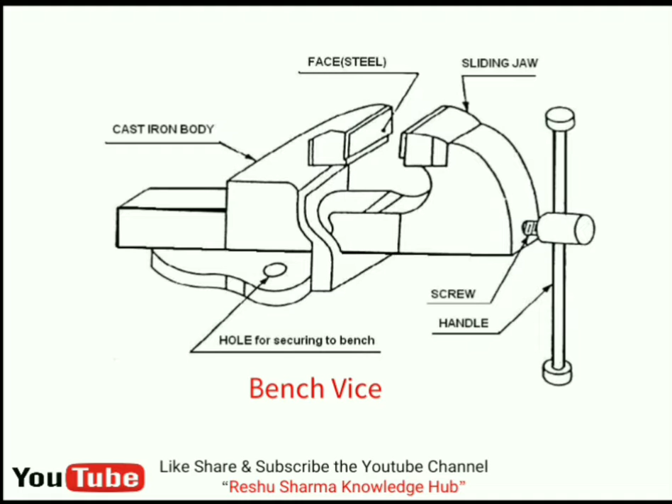This jaw is moving to and fro. This is our face steel, or this is our fixed jaw. This is the body of this, and this is the hole for securing it to the bench. As we rotate this handle, this sliding jaw moves, and whatever workpiece we are going to hold, we will put it here and it will hold it tightly, and we can perform any operation on this bench vice. Generally, basically it is a holding device.

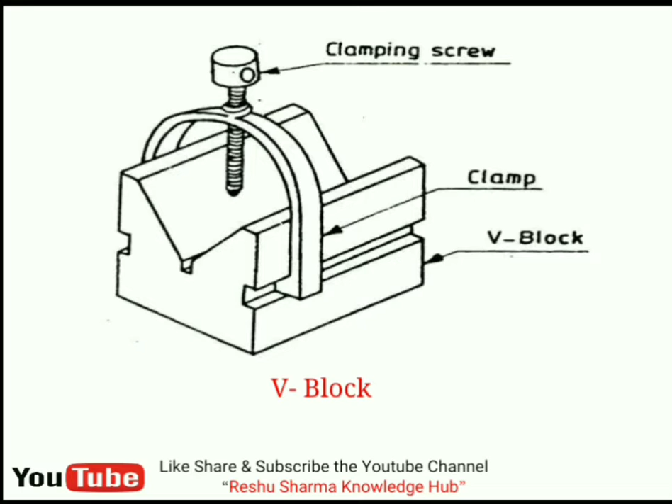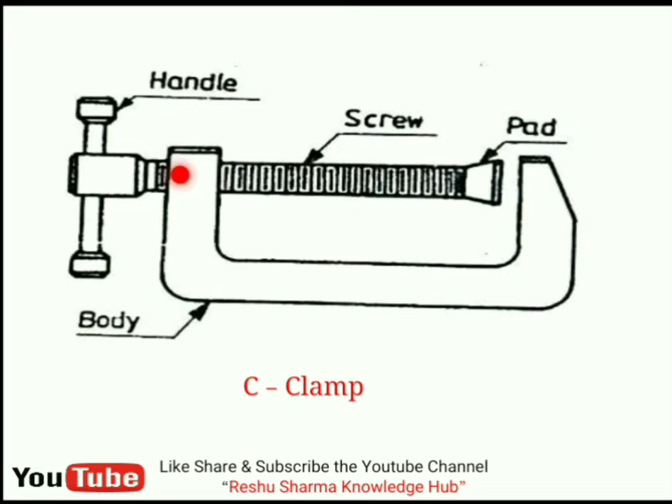Next, this is our C clamp. Because of this shape, this is called C clamp. This is the handle, this is the screw, and this is the pad. We will hold our job in this pad, in the gap between this jaw and this pad. We will rotate this handle and this screw will move, doing a to and fro motion.

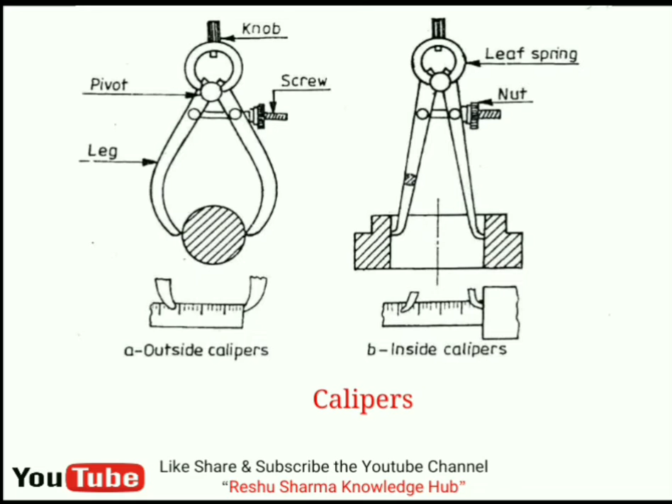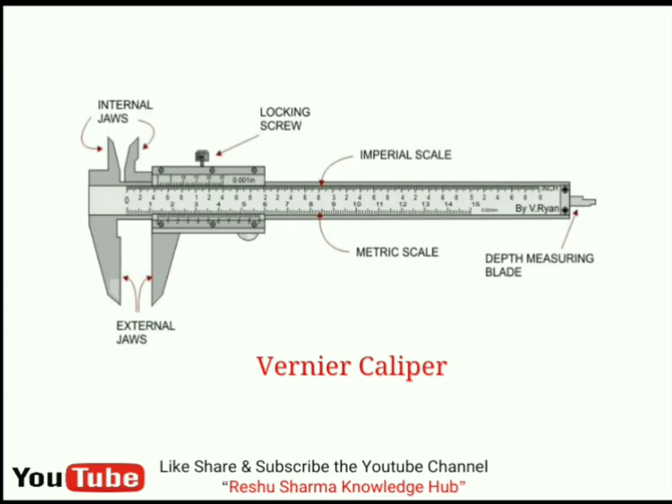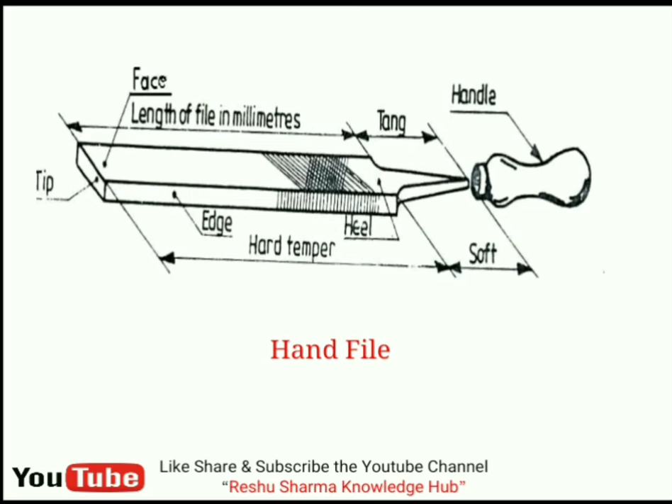By moving this file to and fro, we will make the surface of any metal clean.

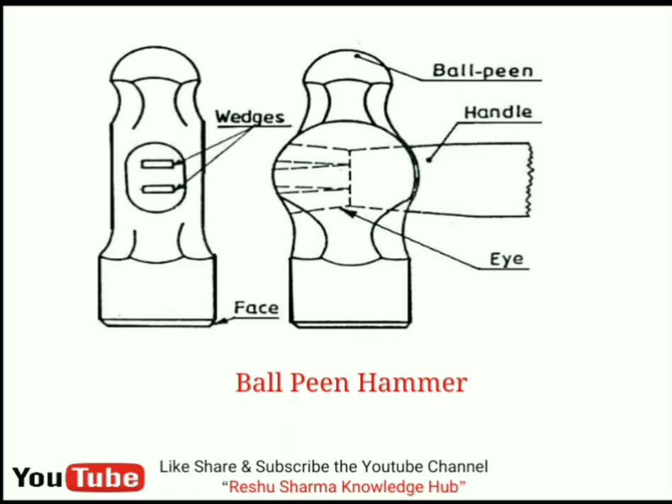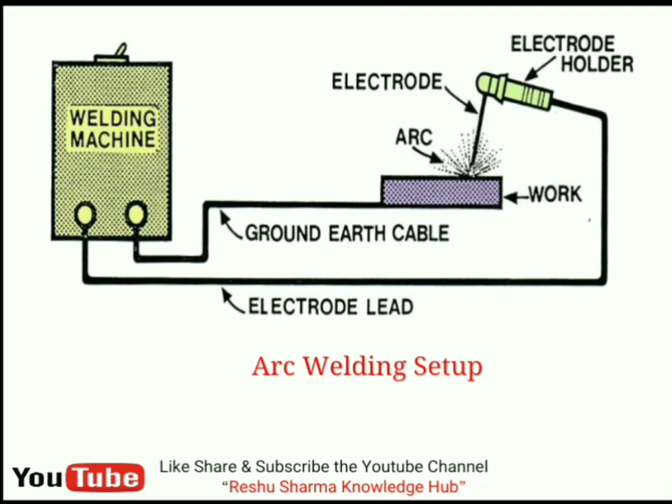Next is our electrode holder. This is our electrode holder. When we press this, this will move down and this gap will move up. We can put our electrode here.

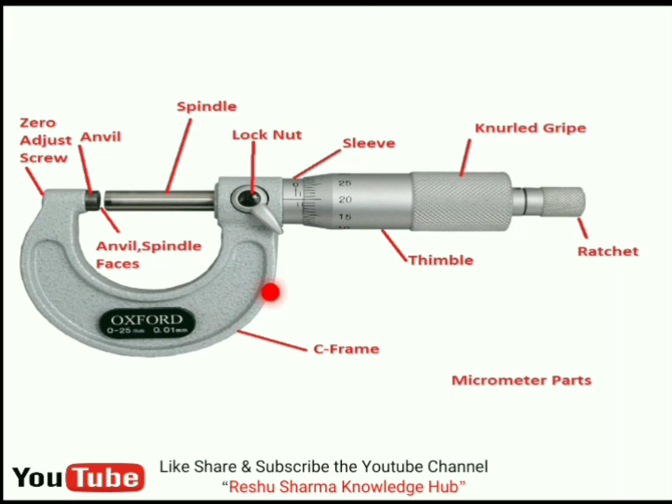Next, this is our micrometer. This is the ratchet, this is the knurled part, this is the thimble, this is our sleeve, lock nut, this is our spindle, this is the anvil, and this is the frame of the micrometer. These are generally the basic parts.